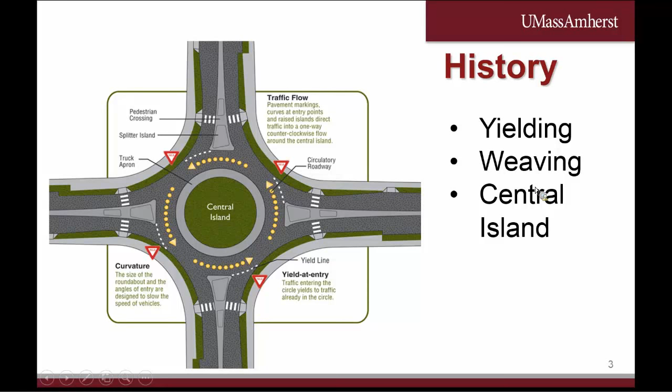Entry speed of the vehicles entering the approach was reduced to 25 miles per hour from 45 miles per hour. As a result, the British found that the capacity increased by 10%, vehicle delay dropped by 40%, and injury crashes by 40%. In Australia, the researchers suggested that the crashes reduced by 65%.

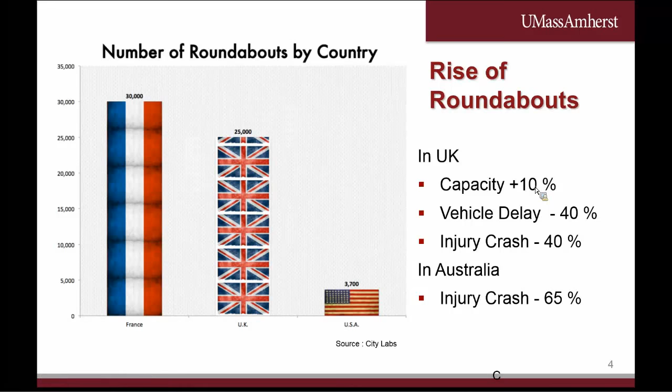So, advantages of a modern roundabout. When operating within their capacity, roundabouts typically have lower overall delay than signalized and all-way stop control intersections. Less delay means more traffic flow. Reducing idling time and vehicle delay leads to less pollutant emission, and it is environmentally beneficial. The central and splitter islands make the roundabout attractive.

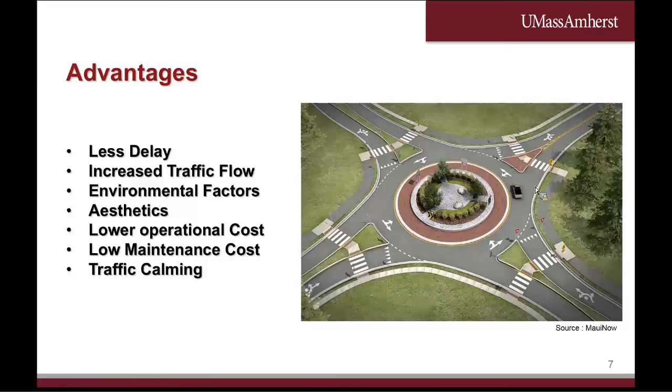The standard signalized intersection has over 32 vehicle conflict points and 24 pedestrian conflict points, whereas the roundabout has only 8 conflict points for both vehicles and pedestrians. Severe incapacitating injuries and fatalities are more rare with modern roundabouts. Numerous studies by the Federal Highway Administration and Insurance Institute for Highway Safety have shown significant safety improvements at intersections converted from conventional forms to roundabouts. The study showed overall reductions of 36% in total crashes, 75% in injury crashes, and 100% reduction in fatalities.

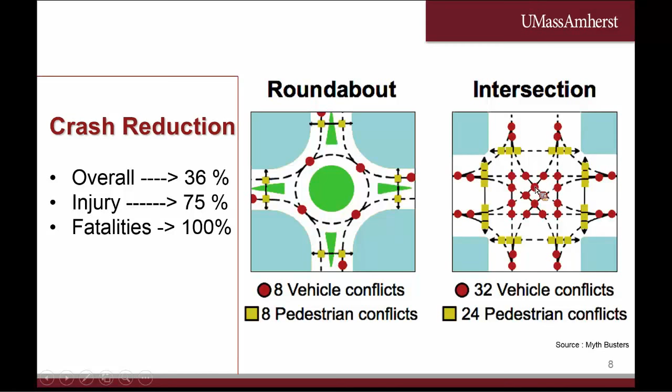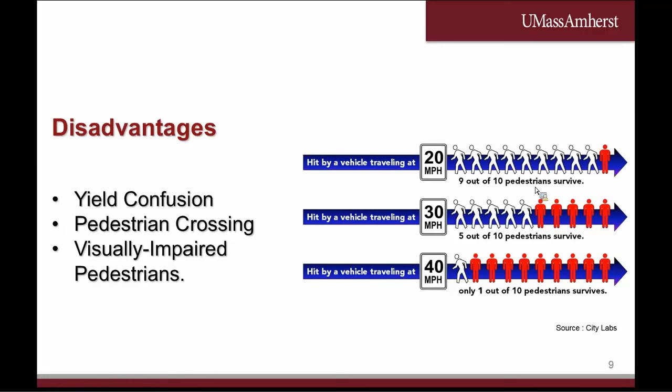In spite of all these advantages, the roundabout faces a few challenges like yield confusion, pedestrian crossing, and visually impaired pedestrians. The aforementioned disadvantages can be countered by gradually reducing the speed of the vehicles as they enter the approach, and increasing the line of sight of the driver while the vehicles enter the approach.

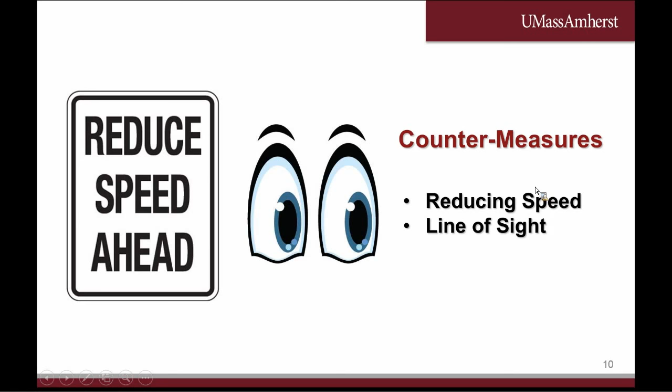So we introduced chicanes to support our hypothesis. Chicanes are S-shaped curves with deflection angles which will limit the speed and improve the line of sight between drivers and pedestrians. And this is achieved by speed reduction by changing geometrical design rather than relying on traffic control devices.

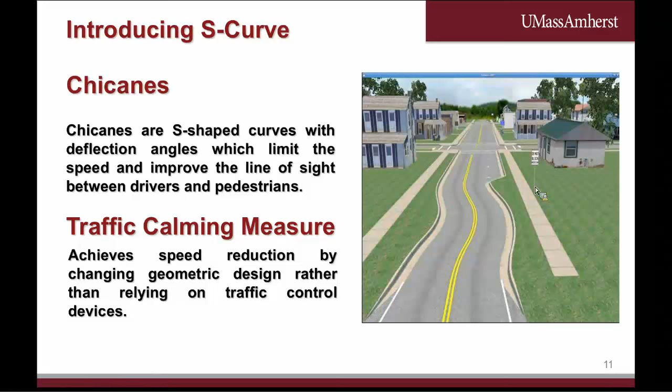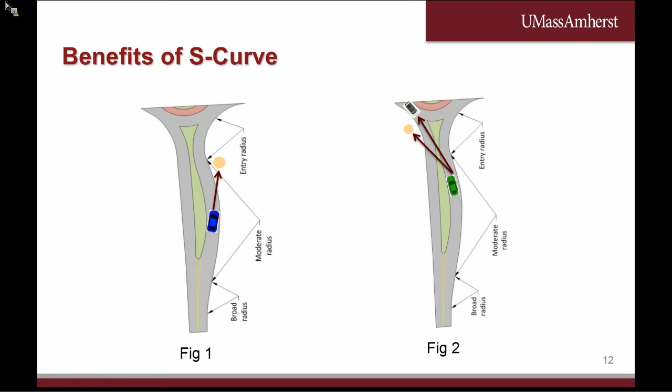So this makes it advantageous for the driver as the vehicle enters the approach, where the driver has better line of sight as the vehicle enters the approach. So the hypothesis of the project is to investigate if there is a uniform reduction of speed when vehicles enter the chicane, and analyze if the speed decreases when there is an increase in deflection angle.

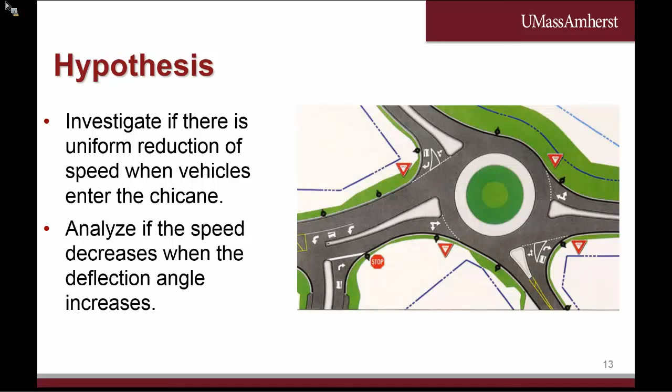So this was the methodology of the study. The selected site was in Amherst. Data was collected in both AM and PM peak hours. The roundabout was then drafted into AutoCAD, and we used AIMSUN in this analysis. The trajectory analysis was done in SSAM.

The site selected is to the north of the campus. Eastman Lane is functionally classified as an urban collector, and the remaining three approaches are classified as urban minor arterial. The intersection falls under large urbanized area.

The roundabout is located to the north of UMass-Amherst campus, so most of the commuters at the intersection are associated with the campus. Hence, the morning peak and evening peak hours fall between 7 a.m. to 9:30 a.m. and 3 p.m. to 5 p.m. And most of the commuters enter and exit the campus.

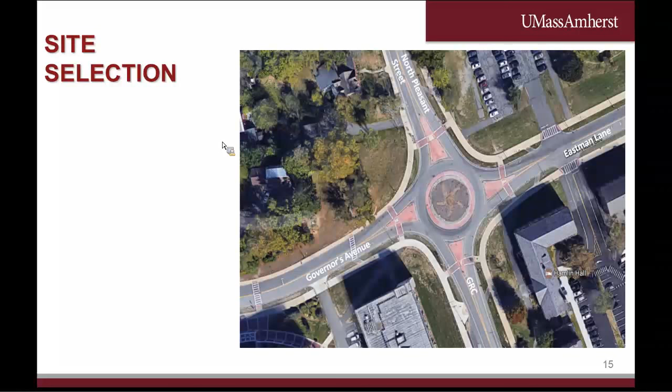The cameras were set up at the yellow dots, where the arrow showed the line of sight of the cameras. The data was collected on a Tuesday, between 7:15 a.m. to 9:30 a.m. in the morning and between 3 p.m. to 5 p.m. in the evening.

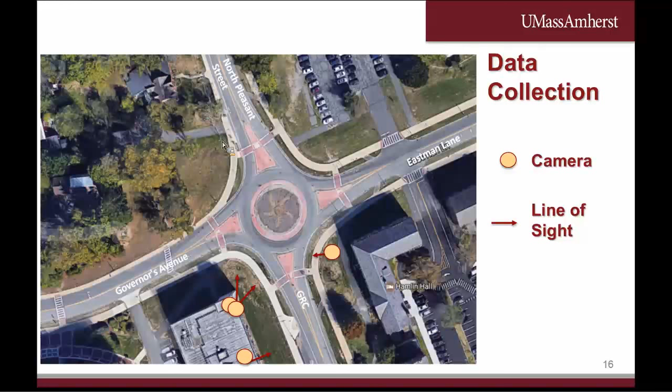There were a total of 1,667 vehicles which entered and exited the roundabout during this analysis. The PM peak hour had more vehicles than the AM peak hour, hence it was used for the microsimulation analysis. During the PM peak, most of the vehicles entered the GRC approach from the south and exited at Governor's Ave, which is to the west.

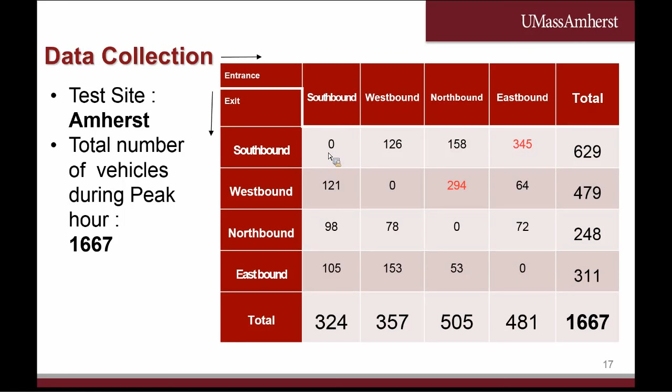So the deflection angle was increased with respect to the central line of the approach, entering and exiting the roundabout. This impacted the radius of the curvature of the approach. The radius of curvature of the approach varied between 138 feet to 152 feet, and this was because as we increase the angle, the length and the angle of the curve increased. So this was the reason for the increase in radius of the curvature.

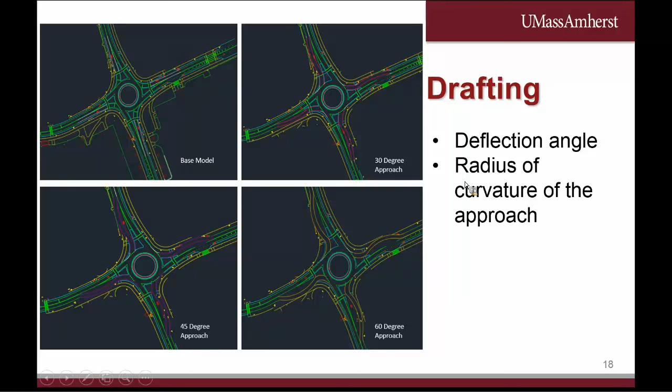The base model is the existing roundabout in Amherst. For the three revised models, the deflection angle of the approach was increased with reference to the central line. The center angle was increased by 30 degrees, 45 degrees, and later by 60 degrees.

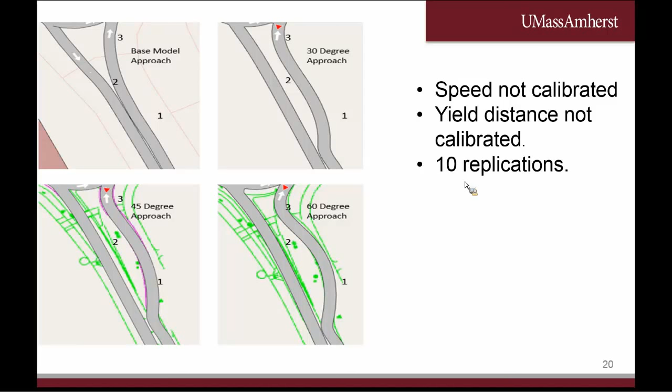So we began modeling in VISSIM. In VISSIM, we were not able to see the changes in speed of the vehicles at the turning movements. When a vehicle transitions from a straight path into a horizontal curvature, the driver tends to reduce the vehicle speed. Simulating this in VISSIM, the vehicles were not found to be reducing their speed, and hence changing the deflection angle did not reduce the speed of the vehicle in VISSIM.

Whereas in AIMSUN, it was found that the vehicles tend to reduce their speed due to the increased deflection angle feature of the roundabout. When the deflection angle was increased, the yield distance to the approach increased. The AIMSUN model automatically calculated the yield distance as the vehicle entered the approach with respect to the deflection angle.

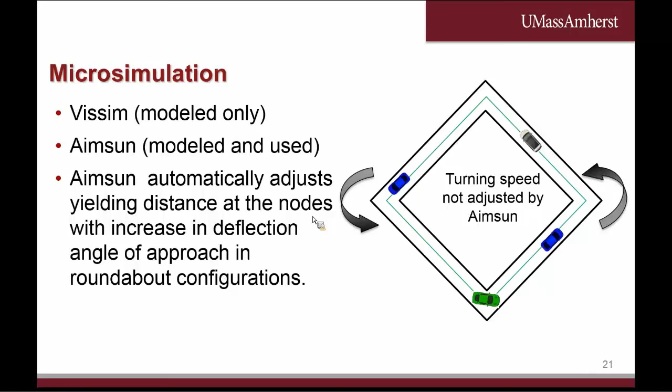So for all the three models, the sections were split into three equidistant distances. The length of the section increases with the increase in deflection angle. A total of 16,770 vehicles and approximately 6 million data points were gathered.

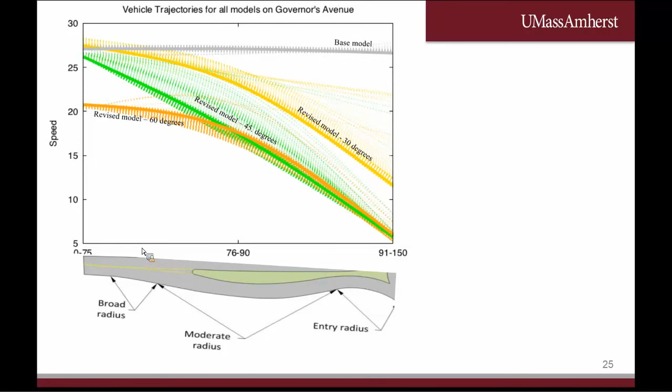So in this graph, it's clearly seen that in the existing roundabout, as the vehicles enter the approach, they continue to go along the same speed till the central island. Whereas in the first model, when the deflection angle was increased by 30 degrees, there was a decrease in speed as the vehicles enter the central island.

And gradually, when the deflection angle was increased by 45 degrees, the vehicles tend to go at a much lesser speed, as the average speed of the vehicles was somewhere around 10 miles per hour as they enter the separated roadway, whereas when the deflection angle was increased by 60 degrees, the entry speed was reduced to almost around 8 miles per hour.

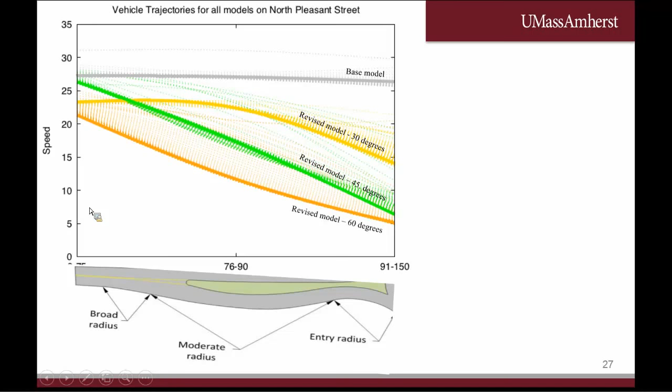So the trajectory files came as an output from AIMSUN and were uploaded to SSAM. SSAM will account for a crash if the vehicle trajectory follows any of the following conditions. The number of conflicts, that is, conflicts under 1.5 seconds time to collision on each link.

The type of the conflict is defined by the angle of impact, where for a rear-end collision, the angle of impact was set less than 30 degrees. For a lane change collision, it was set in between 30 to 80 degrees, and for crossing, it was set more than 80 degrees.

The results indicate that the increase in deflection angle reduces the speed of the vehicle. Hence, vehicles enter at a much lesser speed as we increase the deflection angle. The roundabout with deflection angle 30 degrees tends to have a fewer number of crashes than the existing roundabout.

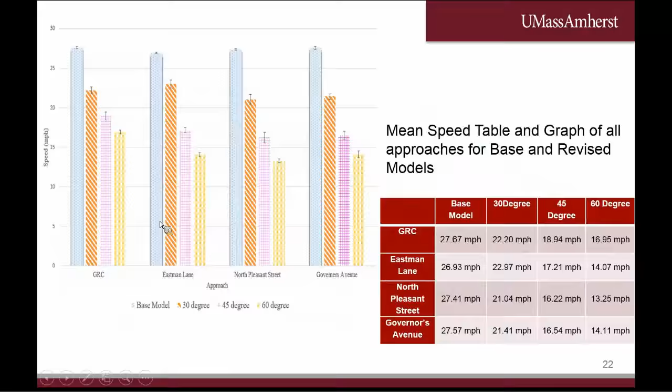And by data points, you mean? The trajectories at any time point. Okay. Thank you. So I had a question on slide 28. My question was about the number of conflicts, and then it says 1.5 seconds. Could you explain that point a little more? Yeah, sure.

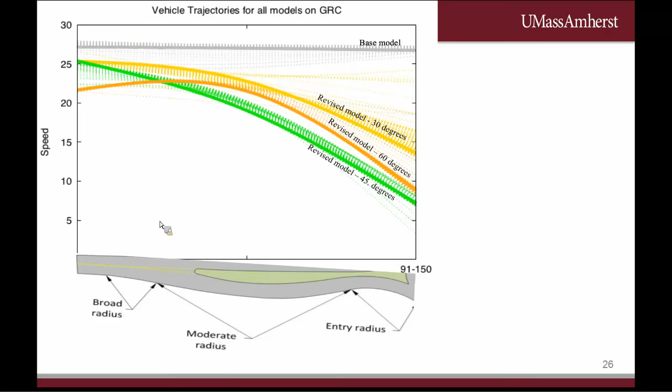So in SSAM, we had to input a constraint or a factor for it to pick the vehicles from the trajectories. So if the distance between 2 vehicles is somewhere around 1.5 seconds, then the SSAM would consider that as an impact. So that's what this number specifies. If the headway or the PRT is somewhere around 1.5 seconds, it will consider a crash. Oh, okay. I see. These are definitions. Yeah, definitions for the SSAM model. Now I follow it. Thank you so much. Yeah.

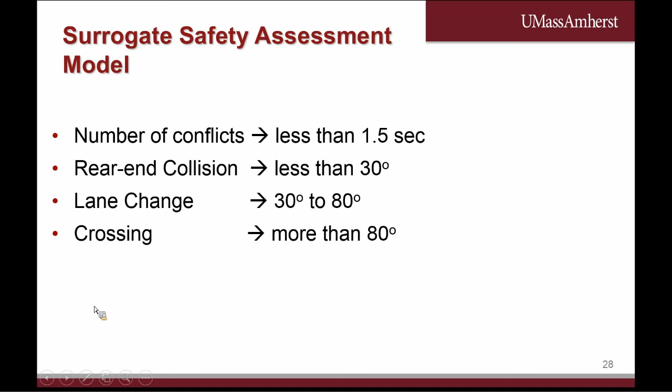So I have another question. This is really interesting because I can see the benefit to pedestrians when cars slow down, and the different angles and that the line of sight changes. But I'm wondering, do you have any thoughts on what these types of approaches might do to the flow through the traffic circle or the roundabout, which is the reason a lot of places put them in, to keep traffic moving. Do you have any sense of whether or not we'd be giving up flow or number of cars through in a certain period of time to get these deflection angles and the safety for the pedestrians?

So I'm sorry, the question exactly is whether I've done any research based on capacity and deflection angle. Is that your exact question?

My question is not necessarily if you've done research, fantastic. If you haven't, do you have any speculation about whether adding these curves to the entrances of roundabouts, which change the line of sight and increase pedestrian safety, also means we're giving up flow, the number of vehicles getting through the intersection in a certain period of time?